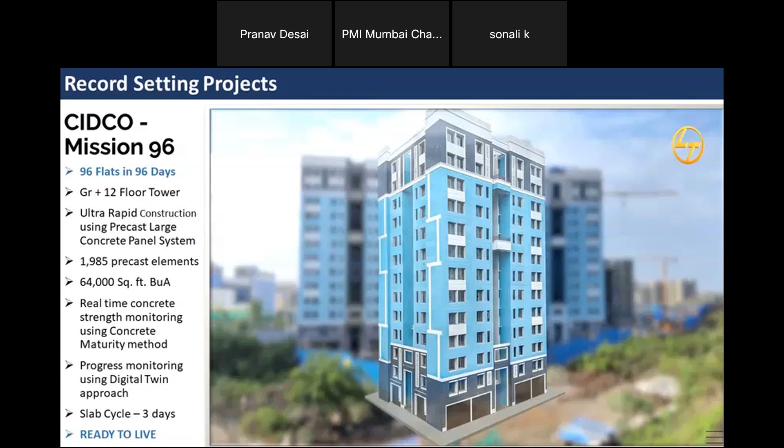Once again, in terms of speed, I am making mention of this particular project. This is a much smaller project in terms of the quantum we are talking about. The size of the project has not been so large as compared to the larger projects of Motera Stadium or the Statue of Unity kind of thing.

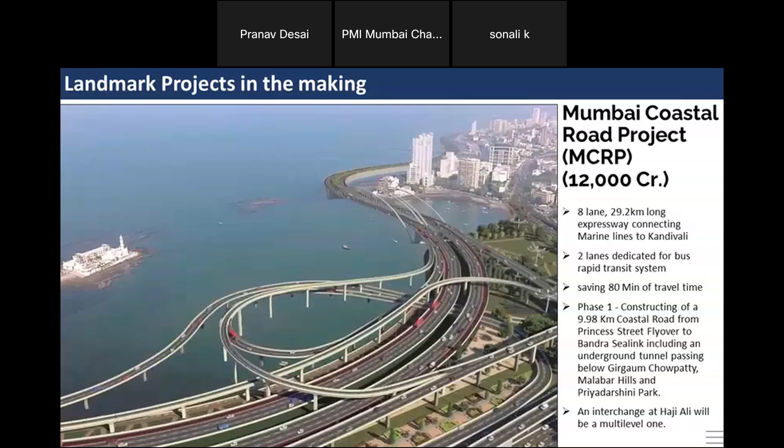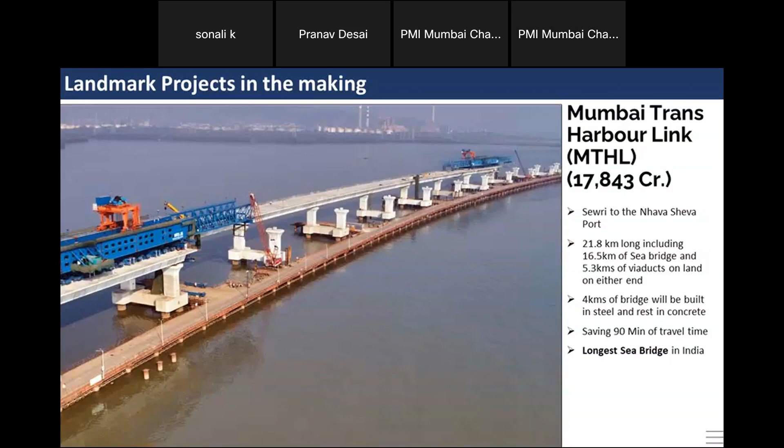Sonali, can we talk? I can hear you, sir. Pranav, sir. Sonali? Yes, Pranav sir, I can hear you.

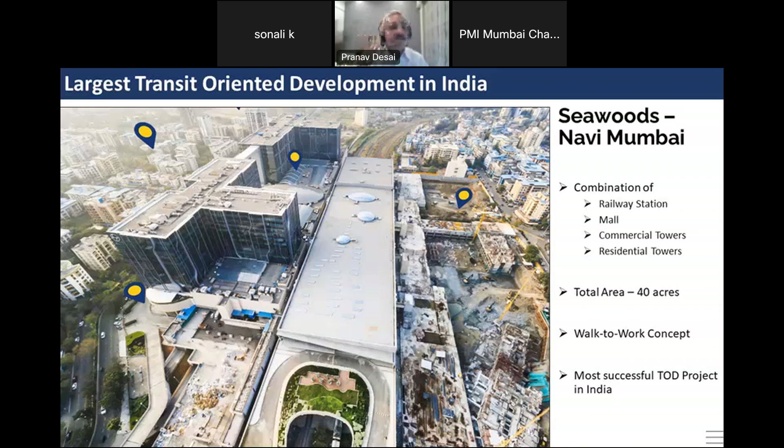Your voice is breaking, sir. I think there were some disturbances. Are you able to hear me clearly now?

Okay, yes, I'm continuing, assuming you guys are able to hear me clearly now. So let's take it forward.

Thank you. So just to briefly touch upon the next point, giving an understanding on transit-oriented development in India, where the transportation ministry thought of a new model where a new railway station would be designed, developed, and executed by an agency along with development, offering people a very advanced level of transportation infrastructure with spaces nearby and residential spaces along with malls. So this concept brings latest technologies and infrastructure developments available in a single cluster. This is once again a project taken up by L&T, spread over almost 40 acres.

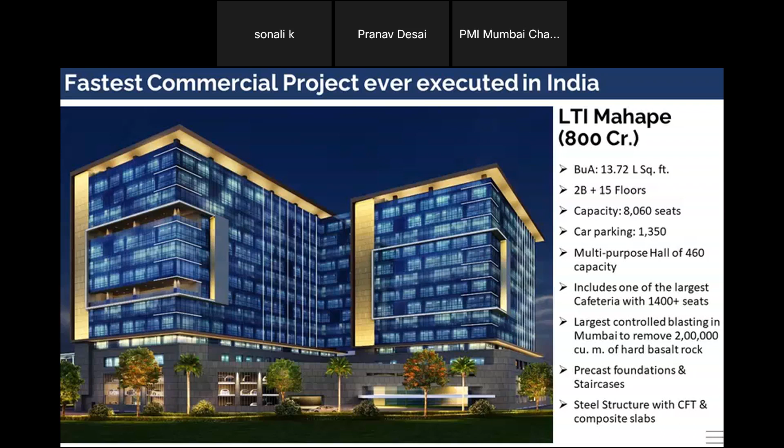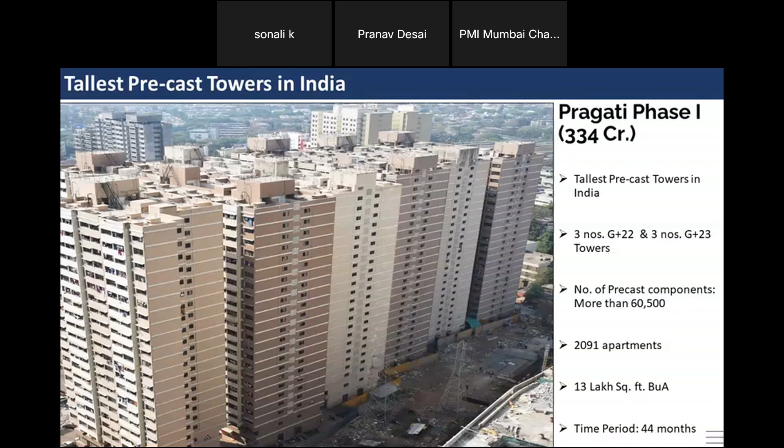Okay, now I will talk about the technology and the innovations that I'm aware of myself and able to present to you. In a steel structure, the slabs could be very innovative slabs or traditional RCC shuttering, with reinforcement put on that and casting the slabs. But that once again takes a lot of time.

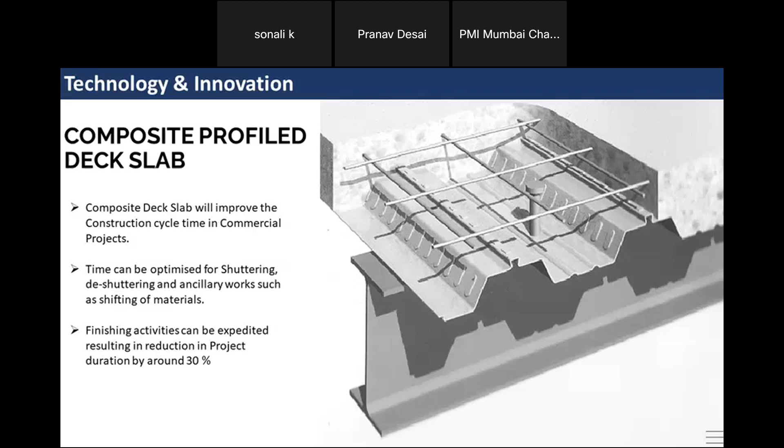Once again, on the same project, we used one more innovation called concrete filled tubes. People associated with steel construction know its advantage: components are fabricated ready, and steel columns, beams, and slabs can be brought on site and physically erected. In typical RCC construction, you go floor by floor, constructing columns then slabs and beams before moving to the next level. Whereas in steel, the advantage is you erect the columns for two floor heights together, which optimizes and reduces construction time.

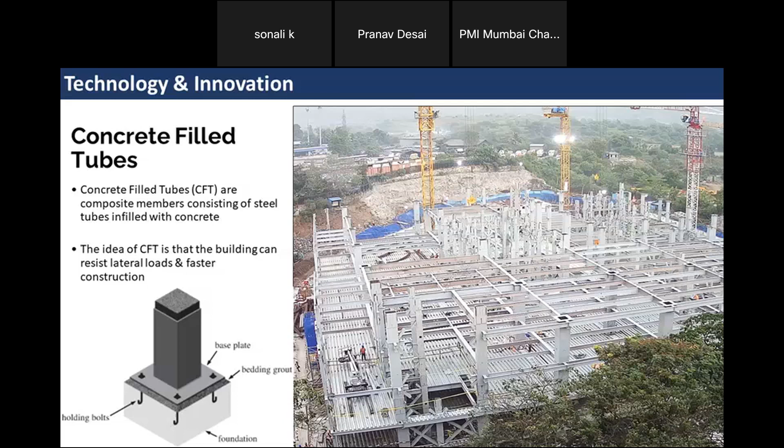But the limitation is that when erecting huge structures, as you can see in the picture, it's a very complex network of columns, beams and slabs. Parallel steel construction could cause lateral sways and change the form and size of the product you're trying to achieve. To optimize on that, the structural concept used was columns in terms of square tubes filled with concrete in the center. This provides stability to remain erect and not allow the structure to sway in either direction, thereby not changing the actual dimensions of the end product. So this CFT, concrete filled tubes, is one technology which has been very successfully used and confirmed for rapid construction technology requirements.

One more thing we are all aware of is 3D printing. This is perhaps one of the most interesting and talked about aspects of construction, found to be of interest across different parameters of applicability. 3D printing has been successfully utilized by us on ground on a bungalow project. L&T Construction, along with L&T Realty, has prepared a sample construction.

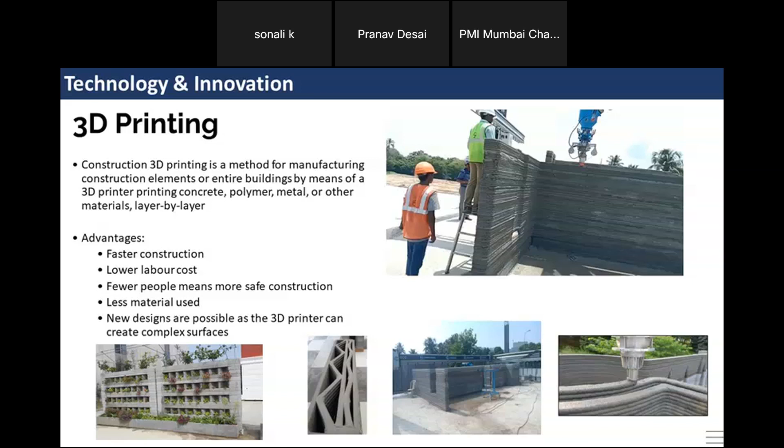The most common and most successfully utilized technology for advancement in construction is BIM design. BIM, I am sure many construction related people are already aware of, stands for Building Information Modeling, and it's basically about multiple designs coming onto the same platform.

It's basically 3D design, where we have drawings prepared on a 2D measure - the plans, elevations, and sections are created. But using the benefit of digitization, where designing is done on a 2D platform - the plans, elevations, and different sections are created - that is then combined together on a 3D platform, where every single component of the structure and every single component of the services are combined to understand the collisions and the complexity of any particular member affecting the other.

Once the structure is designed, the services are logically designed as a second part to come over the structure and provide further service benefits. But many times during execution, it is observed that the services do find certain problems, and certain local variations are required, where the structure having been constructed, it becomes a limitation.

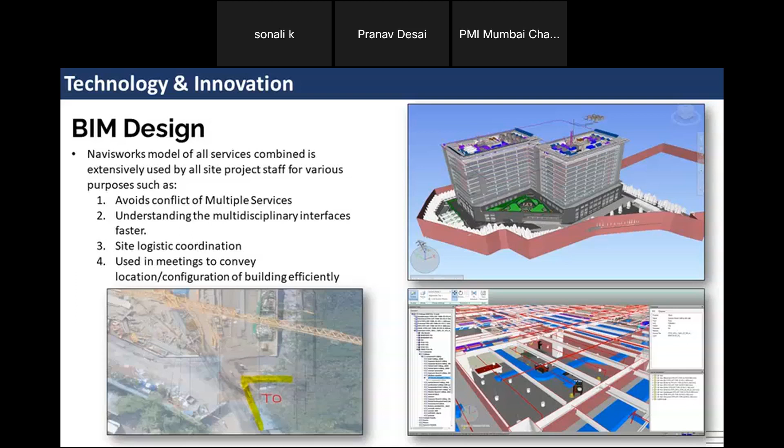We then take this picture and simply overlap it with the BIM model picture to understand what are going to be the further complications and further critical requirements, because this project, with the challenge of getting completed in 16 months, was never tried, thought of, or executed anywhere in India.

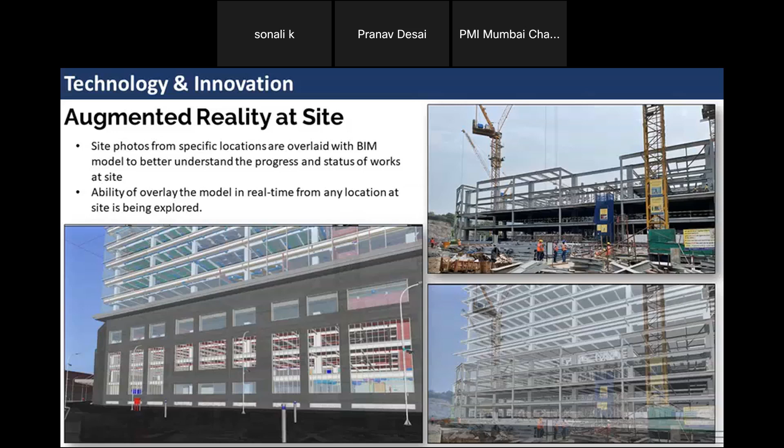So with this, having talked about the technologies, I'll now talk about the standard process or typical project life cycle, particularly in L&T Realty. L&T Realty is the real estate arm of L&T Construction, L&T Group, where we develop residential, commercial, and transit-oriented structures and sell them as a developer. Typically, almost 80% of our projects are residential in the present division where I'm working.

The entire project is divided into five different components. The first is the conception and initiation stage, covering the entire development possibilities, logical options in terms of overall maximum construction area with the best construction technology possible, at the same time creating maximum value out of the project.

Because any project, if taking a residential project, the intent is to create a project which gives maximum usable area to the end users with the best feel, best experience of excellent amenities, maximum green areas available, and creating that beautiful environment, which is a contribution not only to the end user but to the overall society as well.

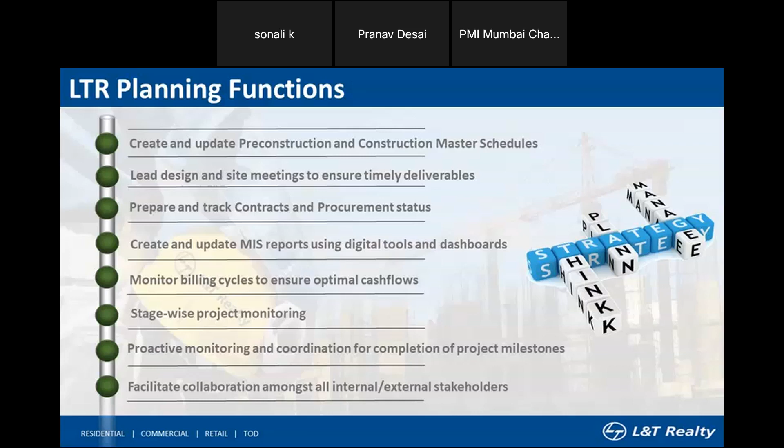One important factor mainly on a residential project is about stage-wise monitoring. Quality is one critical thing which even in the first session there were a lot of questions about, in terms of how do we ensure and how do we monitor the quality. We divide a typical residential project into 6 different stages before handing over.

So the first and foremost is the structure. As soon as the structure gets completed on a floor-to-floor basis, it is handed over to the next stage team, which creates all the partitions and walls. The next level is masonry and waterproofing requirements, where the completed structure is systematically handed over to the next team to their satisfaction, so that any variations, deviations, or small additional requirements are clearly taken care of before finishing activities start, leaving no subjectivities in terms of limitations of the structure created.

Similarly, the next stage is services. In construction language, we call it MEP works - mechanical, electrical, and plumbing works. All three services get executed in tandem, and there is an overlap with the wall or masonry works as well, because nowadays majority of the services are concealed. So once the walls are created, the concealed services are executed, and then closed using different technologies and design requirements.

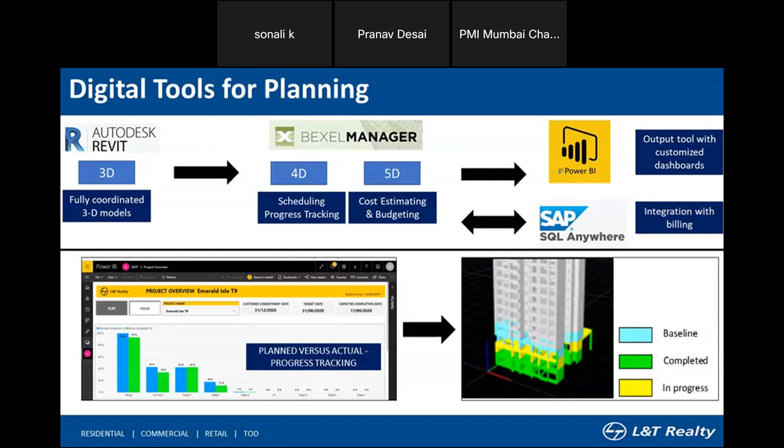There are different color codes provided. In these 3D models, the different color codes specifically indicate what is actual work done, versus work done within the agreed or accepted time frames. Works completed but having absorbed extra time are also highlighted in these models, which is very interesting and challenging, and will keep getting developed further with their own issues.

This is one example where the status and progress status are combined using the Bexel technology, which we are presently using on various projects, where the project structure is put into different colors. As you can see, these are just the fundamental things shown, green color is what is completed, and then the baseline plans and all those things.

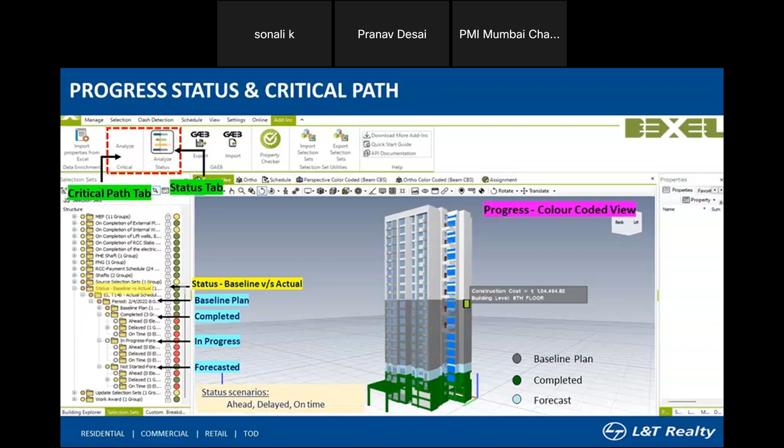These are the different color codes. I've just used this slide to show you the different color codes getting used for different requirements. Different materials and surfaces have different colors, and multiple additional levels of advanced requirements are added into this. Different services appear in different colors, which clearly shows that since you have executed things to this level, the next level of requirement, just by pushing a button, you are able to know what's next. The material, depending on its quality and parameters, is given into different colors.

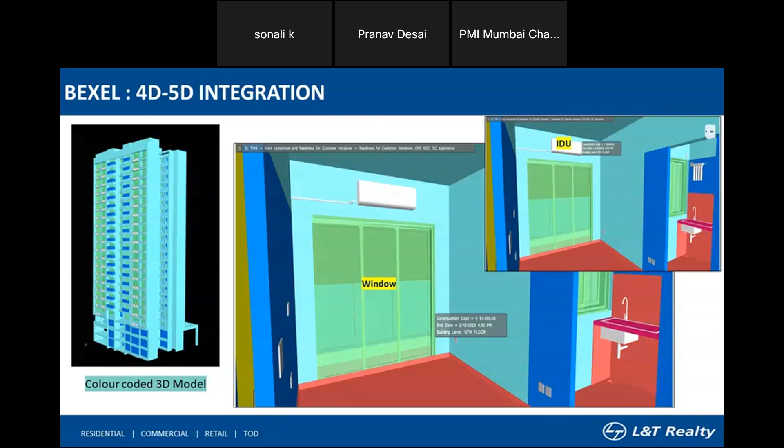Thank you very much, Pranav sir. The audience is very excited, and Prashant says it was an amazing presentation. Thank you for your time.